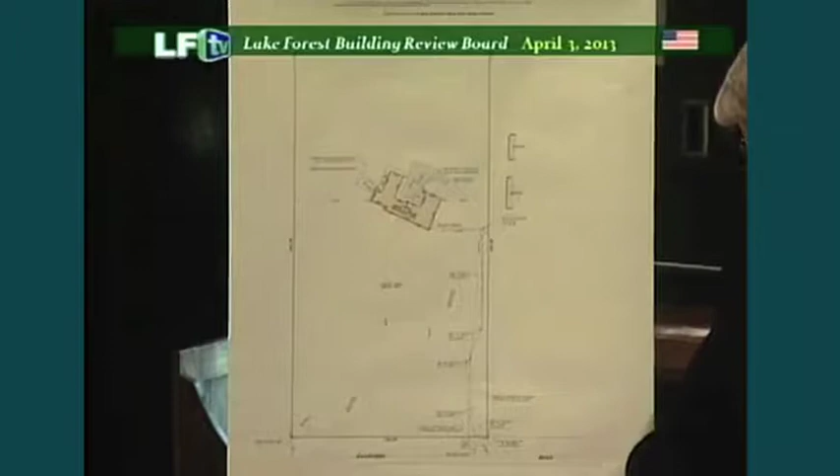Our proposed renovation is adding some square footage with a garage as well as some porches. That's shown in the second item, the civil engineer's drawing, with highlighting that covers the garage addition as well as porches around the perimeter.

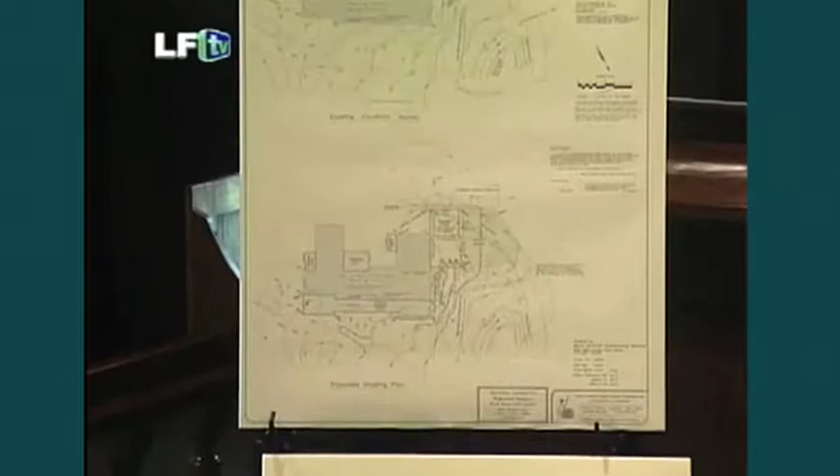We like the idea of working with the existing foundation. Our proposal's concept is creating the living space as sort of a link between two wings of the home. We like that concept for our design.

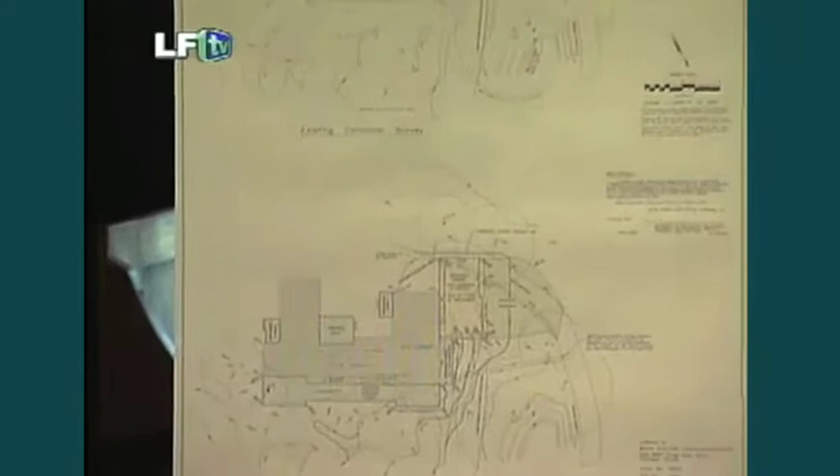The current residence is a little awkward in its current pedestrian entry. The front entry of the house is what we would consider at the rear of the house—you have to drive around to the back, so the approach of the driveway is awkward. We're proposing to rotate the entrance to the east end of the residence, and three-dimensionally, as you'll see in your packets, that works.

Briefly regarding landscape, without getting into a lot of detail—but I can touch on your questions—my client has met a number of times, along with our arborist, with the city arborist. What we'd like to present tonight for your approval regarding landscaping is slightly different than our submission.

To be clear, we're proposing removal at this time of only one tree, which is in the southwest corner of the porch, falling directly in our construction path, and the tree is not in good shape as it stands.

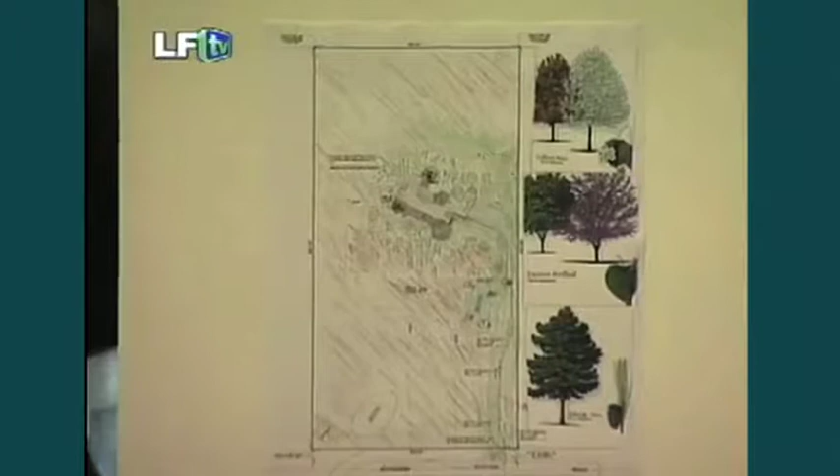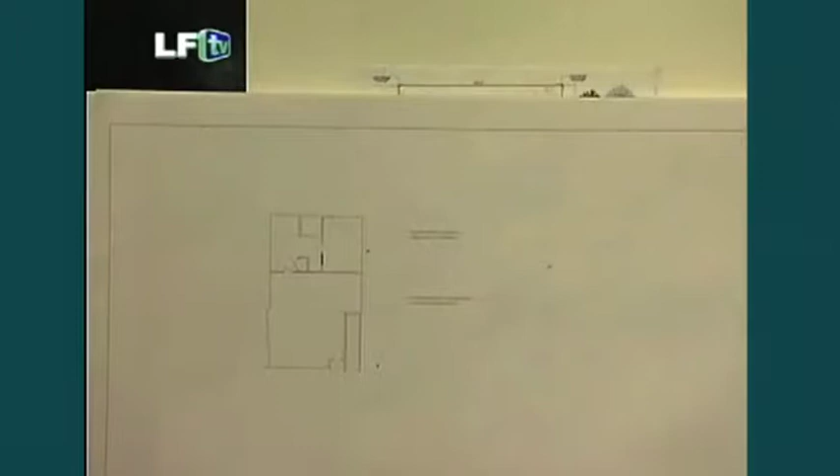You have an exhibit in your packet—sheet A1—which clearly outlines a significant portion of the home we're proposing to demolish. It's certainly in a large state of disrepair, and we can get into that if you have questions.

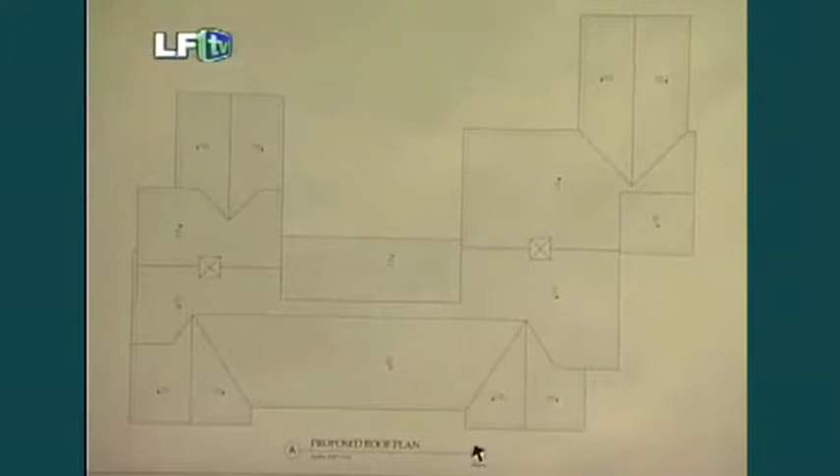Sheet A2 shows the proposed floor plan layout. A3 is the roof plan—we're proposing all roof pitches at 7:12, with the exception of the center portion of the screened enclosure along the south, reduced to a 4:12 pitch. We think the scale works very well at the lower roof line of the renovation.

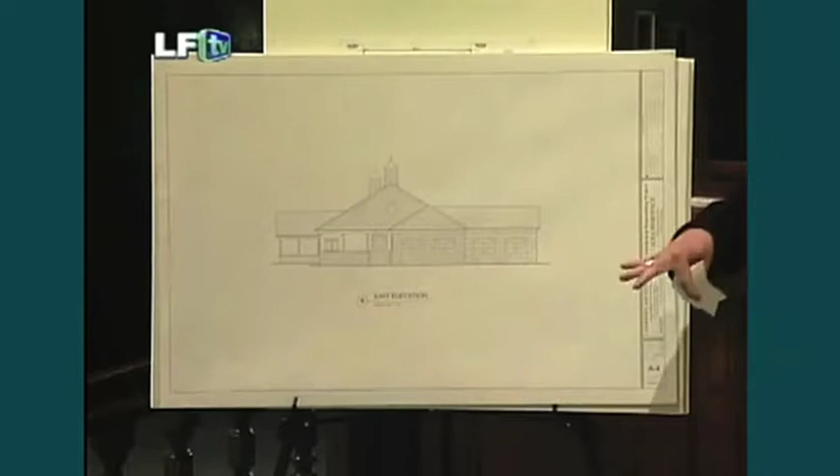Briefly, the east elevation becomes our main entry for guests. The new garage addition is also oriented to the east, and the drive approach is simplified rather than wrapping around half of the residence. We're proposing single overhead garage doors.

The garage doors would be custom-made with wood cladding. The majority of the residence would be stone clad—the stone color and layering is shown in the mock-up in front of you. I'll add that in our submittal packet we mentioned thin stone, but we'd actually like to change that to a full 4-inch nominal stone thickness around the entire home. In the gabled areas only, we're proposing a stained wood cedar shingle.

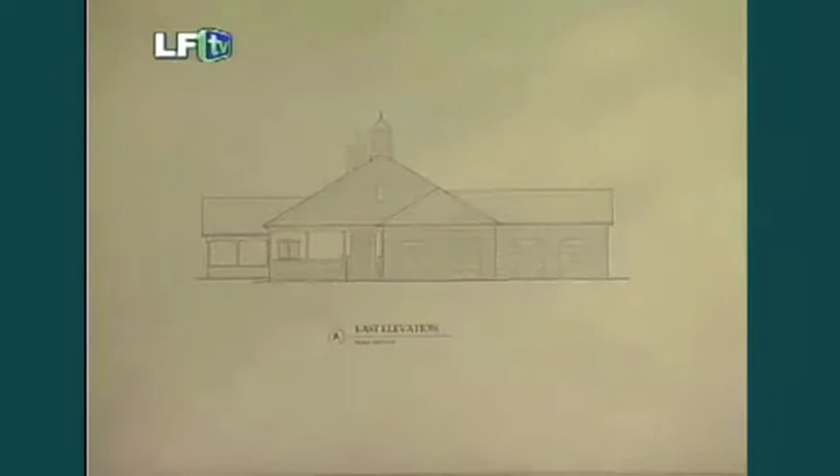We have natural cedar shake roofing proposed. All of the wood trim on the home is proposed in a taupe color palette, and the gutters and downspouts would match that.

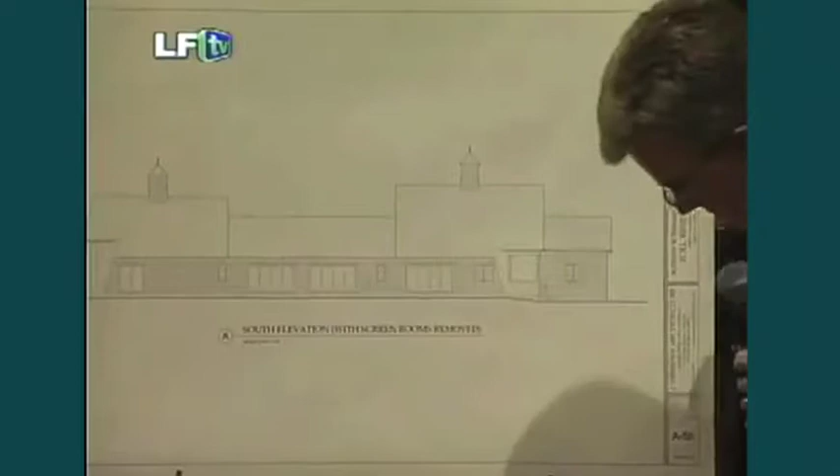Then we've carried the detailing of the residence all the way around with the gables and other fenestration.

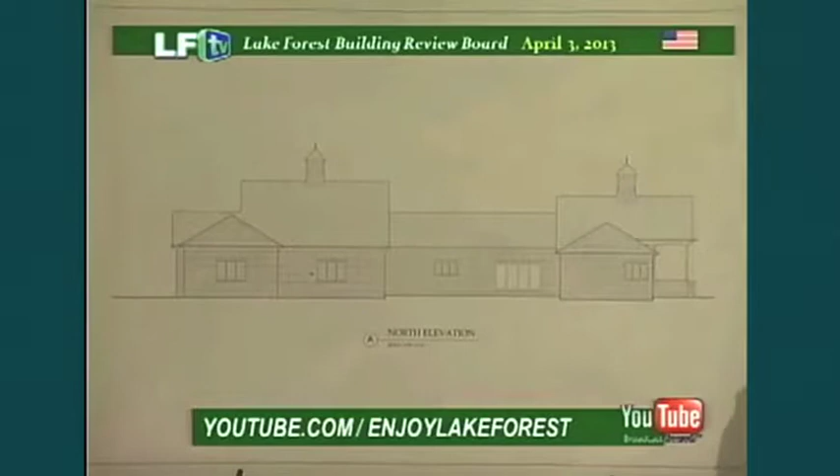On the north elevation, the materials are carried through consistently. A lot of this house is in disrepair, but there are some nice, large sliding glass wood doors. We'd like to propose reusing those doors to access the screen porch.

All the other windows are not being salvaged. We're proposing new windows in a taupe color, aluminum clad with wood interior, with simulated divided lights by a manufacturer of the quality of Marvin or Andersen. At the gables, we're proposing a corresponding color standing seam metal roofing, pre-finished.

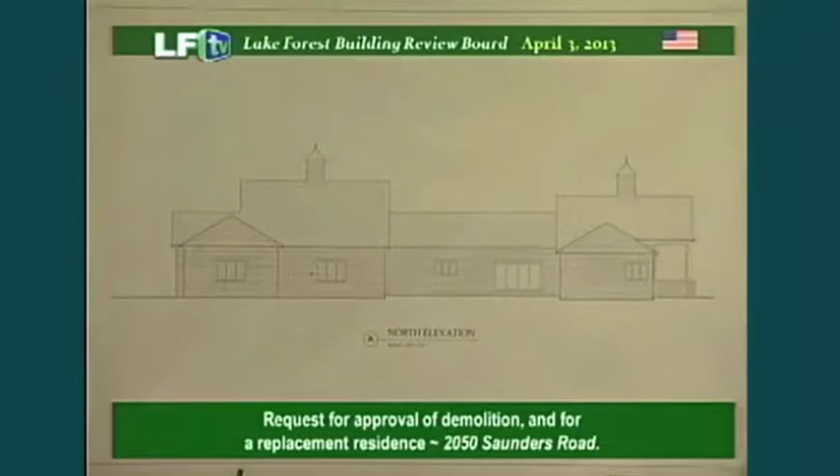I'll leave it at that and certainly open it to any questions you might have.

As part of their submittal, the demolition criteria have been addressed. They've submitted appropriate materials to support the demolition. I'd like to comment that neglect or lack of maintenance isn't itself a justification for demolition, but I think in this case the material submitted in support of the demolition does address the criteria.

Are you using the exact footprint and foundation that's existing? For the habitable space, correct. The garage is an addition, and only the porches are additions, to add some articulation to the residence. Does it have a basement foundation? The portion we're proposing to keep has a basement; the rest is slab on grade.

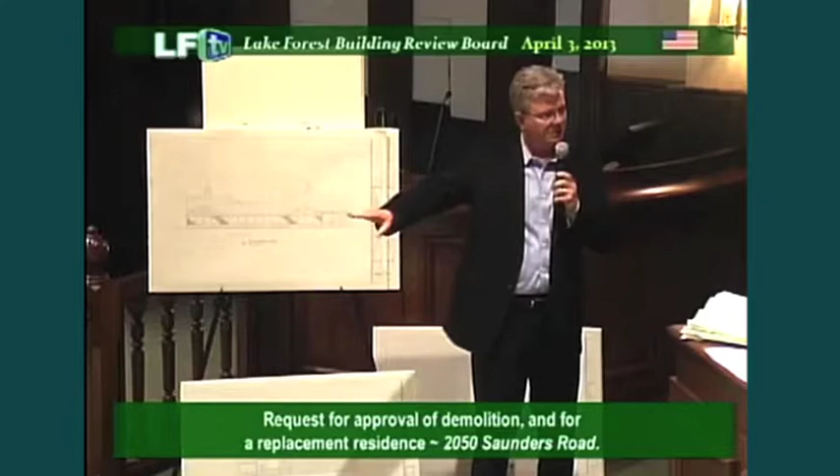And the cap on top? Rather than do copper or something and introduce another material, we'd prefer to use a pre-finished aluminum that matches the other metalwork on the residence.

Tell me again why you decided to move the main entrance from the north side of the house. Architecturally it's just very odd, it doesn't work well. On the drive approach, I find it very uncomfortable to have to drive around to what feels like the back of the house. We'd like to reorient that so the rear of the home actually has yard space and acts in that way, and we eliminate a lot of the pavement associated with that.

I like it. I think it's a strong statement, and it's simple, it's low. It doesn't offend me at all. There's a logic to it. I do like it, and I can support it.

One of my first comments regards the location of the entrance, moving it around to the courtyard side. Especially if you're on the fence, I'd strongly discourage that. I feel it's extremely important that as we approach the residence, we can see a defined entrance, however modest it might be, and this is a modest home in its simplicity, so I think that's important.

I'm not in support of this as is; I think the screen porch is just too long. I appreciate the materials and the overall design simplicity, but for me the screen porch is too long, so I would like to see that adjusted. I understand other people don't have as big a problem, but I will vote no.